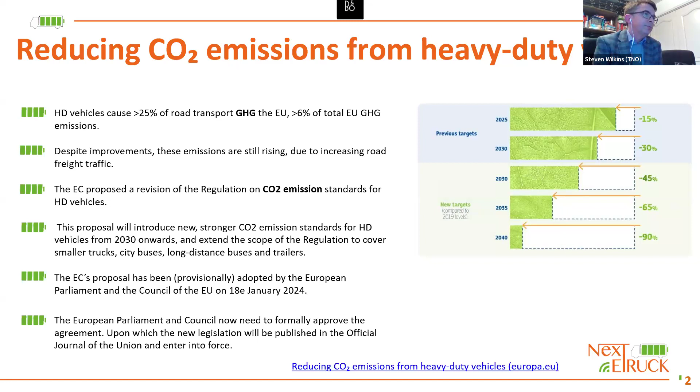Meeting these targets, these policy objectives, these strategies require several different insights, both technical and non-technical. There are several challenges to the upscaling of electric truck deployment and development. What's very important is to have independent assessment of the different technologies as they come into real-world operation.

But it's not only the vehicles when we're talking about electric trucks, it's also the infrastructure. There are other policies like the alternative fuel infrastructure regulation as part of Fit for 55, which need to support these types of trucks coming into practice.

There are other technologies running alongside to help with logistic planning, monitoring, and health tracking of these vehicles, such as digital twinning, which I'll mention a bit later. So there are many challenges ahead of us in getting these trucks deployed, and we have a relatively short period of time to reach the targets set by the EC. There needs to be fairly rapid adoption of these technologies in practice.

These new CO2 targets are split across the different vehicle weights. The heavy duty, medium duty, light trucks and vans, and buses and coaches occupy different parts of the CO2 contributions from transport. Very often there are projects looking at heavy duty and also some of the last mile light duty. NextETRUCK is looking in the medium duty range.

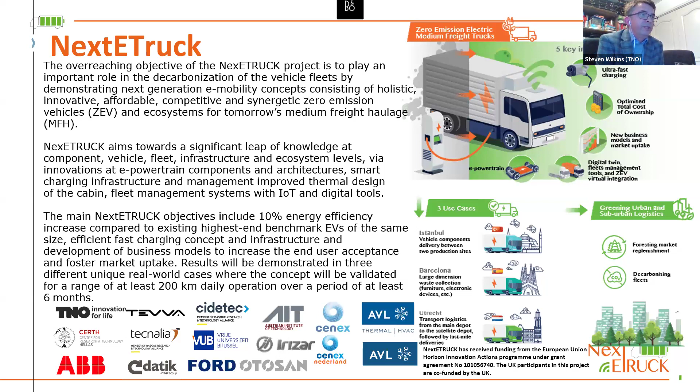We have some overall targets, which I'll come back to in the next slide, in terms of energy efficiency and extensive real-world deployment. These are the objectives for the trucks, focused on the medium-duty freight haulage range. We have a 10% target efficiency overall. This affects the operational costs from the energy usage of the truck, but it also allows for the downsizing of some of the components, including the battery.

Digital twins - the use of models connected to data from the vehicles, supplying optimization back to the vehicles in terms of fleet management - is a key part of the project, both for the planning and operation of the vehicles. We're working with a large number of partners to come up with new tools to help the deployment of these types of vehicles.

Part of the project also focuses on the architecture. It's well known that there's a lot of space for design optimization to take into account safety, sizing of components, integration of new technologies, ultimately improving the TCO reduction that we'd like to see.

Also, alongside that, thinking about new charging concepts, including infrastructure demonstration within the project to make sure it's cost efficient, flexible, and compliant with all different types of business practices and fleet operation.

A large part of the project, beyond developing the vehicles and the technology, is to really have an extensive period of real-world usage. So there is at least 6 months of demonstration, which is unusual for a European project, where we will get insight into extended use of the vehicles over a target of around 200 kilometers daily operation.

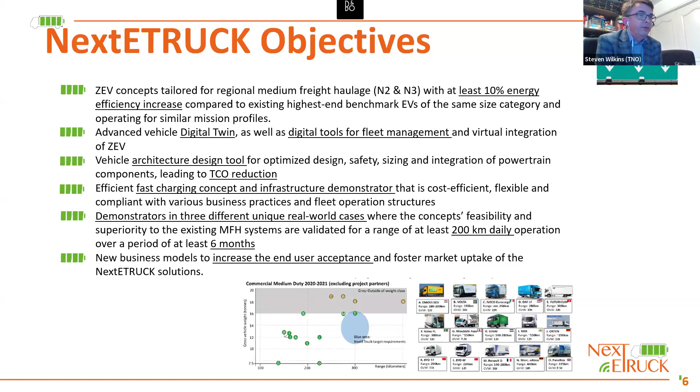Okay, so within the project, there are 3 use cases shown here, connected to the 3 OEMs from the project. So use case 1 is for the truck developed by Ford Otosan, based in Turkey, and this will be transporting parts between various manufacturing plants.

Use case 2 is to focus on the use of the technology for refuse collection in Barcelona. As you can imagine, the use of electric trucks where there's high auxiliary uses also has additional challenges beyond simply the kilometers driven. And use case 3 really is within the frame of this webinar.

So out of town operation up to and including entering into the City of London, experiencing both urban and peri-urban driving conditions.

So a bit extra information about those use cases. So this is use case 1, which is the Istanbul Ford Otosan use case. As mentioned, this is using the vehicle. This is a 16-ton vehicle, so at the upper end of the medium duty scale.

With 200 kilometers daily operation between 2 manufacturing plants over an extended period of 6 months to see different weather conditions, different driving conditions, different traffic, etc.

This is combined with the charging infrastructure solutions, so overnight charging typically to support the day operation with a relatively powerful DC charger. And the charge management, the planning for the fleets of these vehicles will be developed by PANION and ABB.

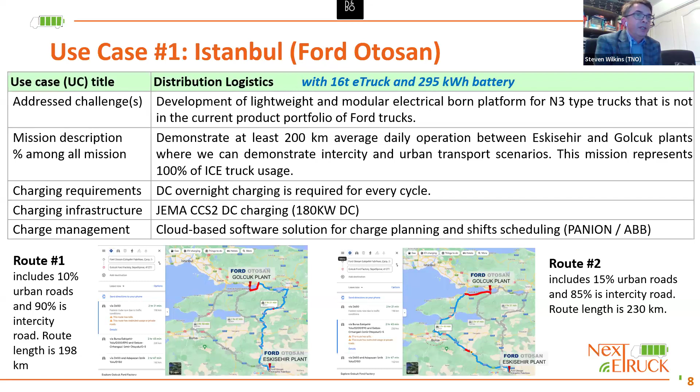So the second use case, this is on large volume waste collection. This is a slightly heavier truck, so this extends beyond the medium duty to make use of the weight allowance for vehicles that have high numbers of auxiliaries.

This is looking at waste collection, so furniture, electronics devices. Since it's within the city of Barcelona, it's not a repetitive route. It will vary depending on the demand service. So we're likely to see very different types of operation of the vehicle.

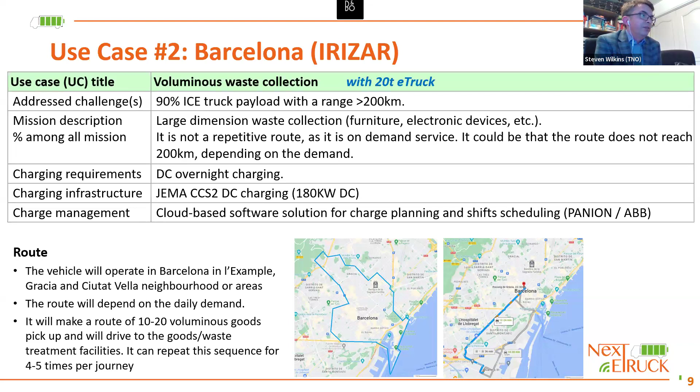Within the urban environment and taking it to outside of the urban environment as well. Again, this is linked to overnight DC charging. The same charging solutions will be provided for this and the same cloud solutions as well.

And the third use case, so this is at the lighter end of the spectrum. So this is an 8-ton vehicle operation within a very, very large city within London, compliant with the zero-emission zones which are coming up.

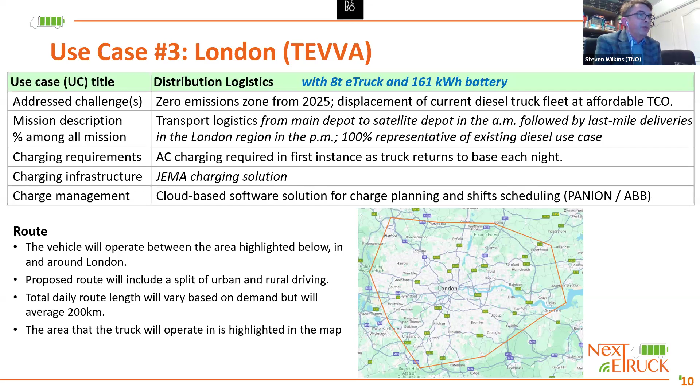This will have a satellite depot outside of the city, entering within the city, and again, varied operation in terms of routes and payloads, etc., within the city. This is coupled to AC charging for night-based charging.

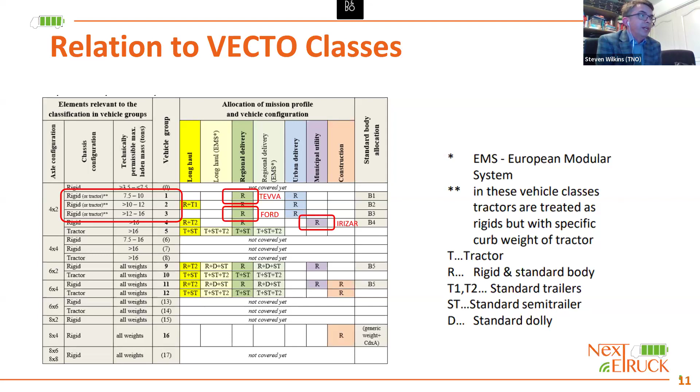So if we look at these vehicles, this is the VECTO classification table, which maps out what types of vehicles in terms of axle configuration, chassis configuration. NextETRUCK focuses then on the weight range from the 7.5 ton to 16 ton, so VECTO class 1, 2, 3. And the various demonstrators, you see, we have a nice split of what's expected for the regional delivery use cases and also the utility vehicles as expected in the VECTO classes.

So lastly, one key aspect of this is it's recognized for both logistic planning and also the operation of the vehicles. It's not always a straightforward swap from a diesel-based vehicle to an electric vehicle. And the reason for that, of course, is that you need to take into account the range of the vehicle.

The planning and availability of charging infrastructure, but also with introducing any type of new technology, you need to track the health, anticipate things like predictive maintenance, feedback for the driver and operation. And this is where, from this project and several others, we really see a need for more sophisticated digital twinning, so the coupling of a model with data coming back from the vehicles in practice. And these are some of the innovations which are done, as I say, within NextETRUCK.

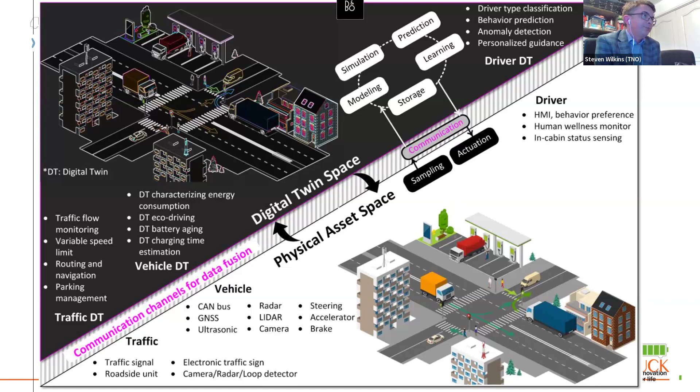So in summary, there are several challenges to upscaling zero-emission vehicles in practice in terms of the timescale, the maturity of the technology, and the policies that we see coming in. It's very important that real-world testing teaches us that the data and modeling of these types of vehicles will be more important than for conventional vehicles.

I highlight within this presentation also digital twinning offers a way of monitoring and optimization. Ideally, we move to some standard digital twins which are used independent of the OEMs for mixed fleets.

As we start to shift towards zero-emission vehicles in combination with solutions from charging infrastructure, NextETRUCK is a project, of course, we're very proud of. It's one of a set of projects at European level realizing solutions. We focus on this Goldilocks area of the medium duty, and of course there's more collaboration possible beyond this project.

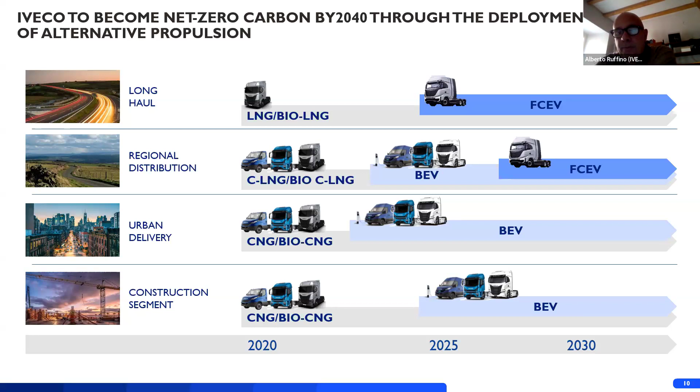What do we see? As far as diesel and internal combustion engines are concerned, we see that they will be progressively replaced by electric vehicles in the light commercial segment, and gas can contribute, but in some niches. We see that there could be a switch to bio-CNG, so that in a well-to-wheel approach will be zero emission.

As far as battery electric vehicles are concerned, we see that by 2025 we should have something like 10-20% of the market for new registrations, then progressively growing up to 50% by 2030, and 70-90% by 2035. As far as heavy duty is concerned, we see that diesel will of course drop and should be below 50% by 2030.

Gas today is the only viable alternative to diesel, and it could also grow in the medium term thanks to biomethane. As far as electric vehicles are concerned, both battery electric and hydrogen, we foresee they should have between 5-10% of the market in 2025, and then progressively grow up to 60-80%, according to the CO2 regulations and the decarbonisation strategy we set for ourselves.

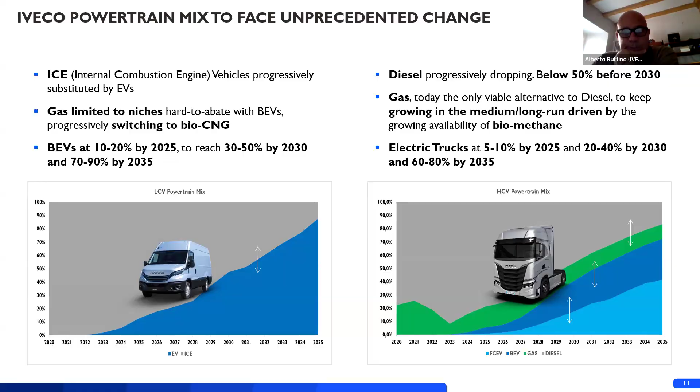When it comes to hydrogen mobility, we see hydrogen first addressing regional missions as well as long haulage, because range and payload are two key factors for those missions, and battery electric vehicles, because of the weight of the batteries, could not fulfill these requirements.

Our application that will go on the road with the H2Haul project by the middle of this year, for the first real life operational test, is a tractor 6x2 with power up to 645 HP. We have a storage capacity of 70 kilograms at 700 bar, allowing approximately 800 kilometers range, and importantly, a refueling time of up to 20 minutes, comparable to diesel.

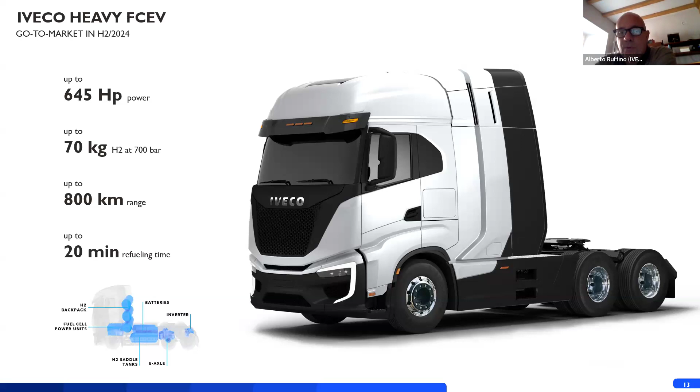Actually, another important factor for this mission is the refueling time, and hydrogen is much more competitive than battery electric in this regard.

When it comes to hydrogen, but in principle when it comes to zero emission mobility, vehicle technology is very important, but it's not enough to make it happen. We really need the ecosystem, the hydrogen ecosystem, so the creation of a brand new, completely new ecosystem.

And when it comes to the ecosystem, it's made by different stakeholders, starting of course from the vehicle, the product, the OEM, but also very important are the hydrogen companies, the oil companies, to produce the hydrogen and develop the network infrastructure. We will need new services to handle this new mobility, which is quite different from the conventional one.

Of course we need the infrastructure, which is a significant challenge we are facing, and other enabling factors such as incentives to facilitate market uptake at the beginning, because as you can imagine the technology is not as convenient as diesel - or let's say the total cost of ownership is not as convenient as diesel. We need proper regulation to also incentivize network development, and we also need technical standards to rule hydrogen stations and refueling activities.

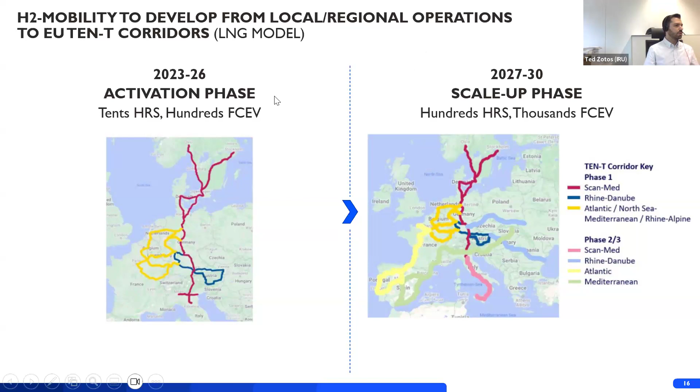Perfect, thank you very much. The second question I think will be covered during the panel discussion. So I will invite Robin to take the floor and just let us share the screen, the PowerPoint.